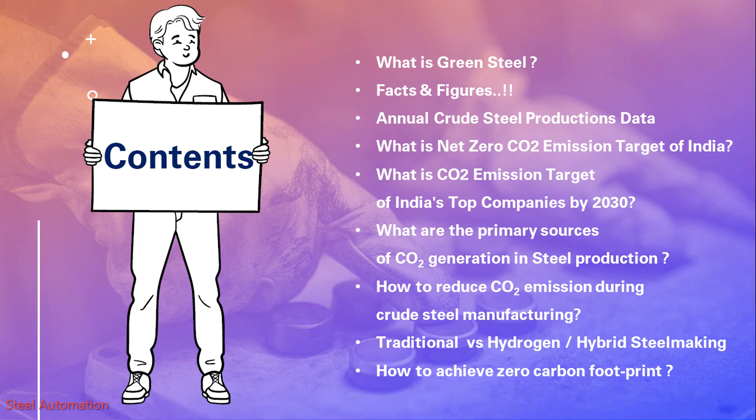So, what is green steel? Steel with zero carbon emissions, but in the current scenario, steel with the lowest carbon footprint currently possible. Forbes India mentioned in an article that, in order to significantly reduce CO2 emissions during steel production, fossil fuels, especially coal, need to be replaced by green hydrogen, which is produced from renewable energy sources.

Volkswagen plans to use this low-carbon, non-fossil fuel steel in major projects such as its upcoming Trinity electric sedan. Last year, Volvo and Mercedes-Benz announced that they too would soon use green steel in the production of their future models. This type of initiative will help significantly reduce the carbon footprint of these manufacturers, for whom sustainable development and the circular economy are now two key concepts.

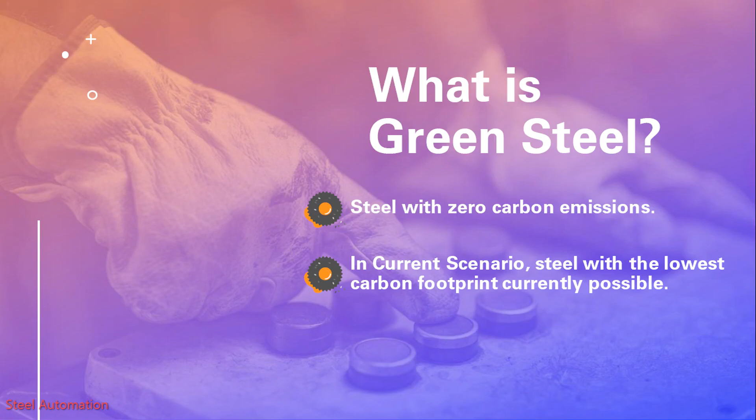Some facts and figures. This graph shows carbon emissions from fossil fuels and industry in billion tons, by continent and country. Asia is the largest contributor of carbon emissions in the current decade, whereas China is the largest contributor. Along with India, Qatar, Saudi Arabia and other fossil fuel producing countries are also part of the carbon emission.

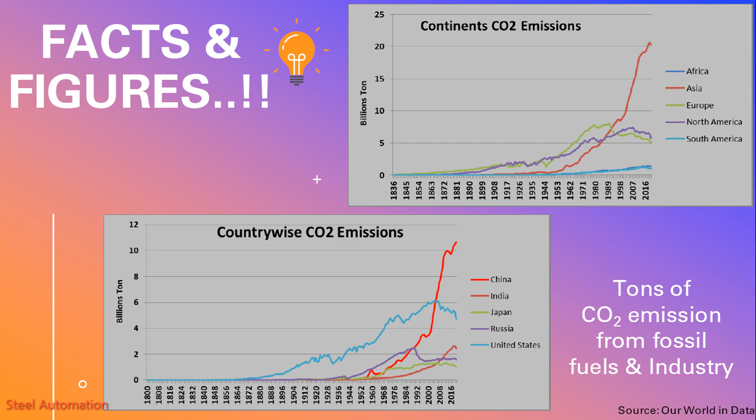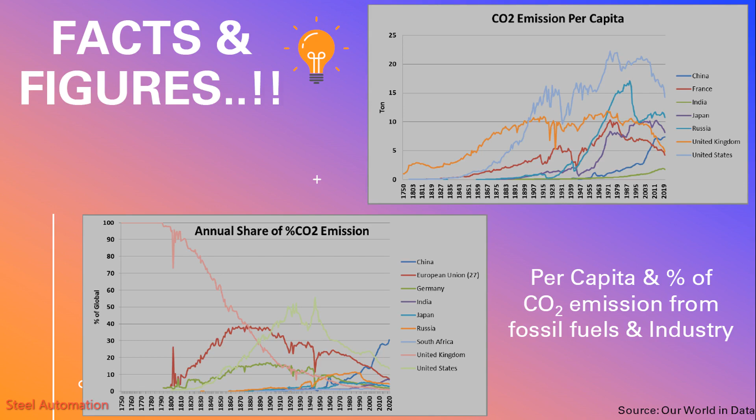In this graph we can see that carbon dioxide emissions per capita and percent share of annual global carbon dioxide emissions are increasing for Asian countries and developing countries. So, if we calculate the cumulative contribution of carbon dioxide emissions over the last 3 to 4 decades, the United States is the greatest contributor, followed by China.

Human emissions of carbon dioxide and other greenhouse gases are a primary driver of climate change. We see that over the last few decades, global temperatures have risen sharply to approximately 0.7 degrees centigrade higher than our 1961 to 1990 baseline. When extended back to 1850, we see that temperatures then were a further 0.4 degrees centigrade colder than in our baseline. Overall, this would amount to an average temperature rise of 1.1 degrees centigrade.

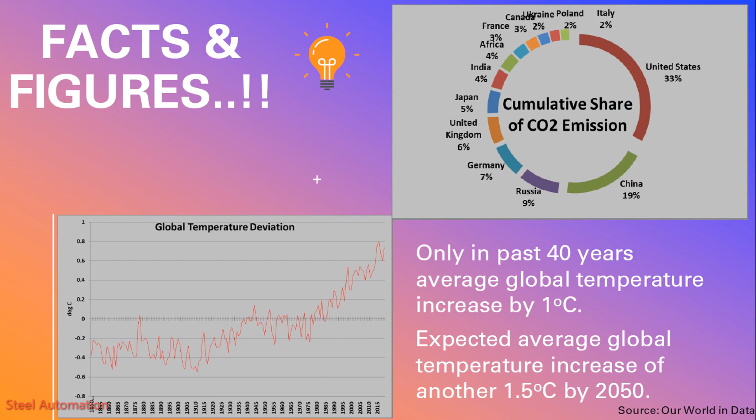Only in the past 40 years, average global temperature increased by 1 degree centigrade. An expected average global temperature increase of another 1.5 degrees Celsius by 2050 as per an expert. Emissions come from many sectors. It is clear from this breakdown that a range of sectors and processes contribute to global emissions. Let's walk through each of the sectors and subsectors in the pie chart one by one.

Energy sector, electricity, heat and transport, 73.2%. Out of which energy use in industry 24.2%, transport 16.2%. Energy use in buildings, 17.5%. Energy-related emissions from the manufacturing of iron and steel is 7.2%. Direct industrial processes, 5.2%. Waste, 3.2%. Agriculture, forestry and land use, 18.4%.

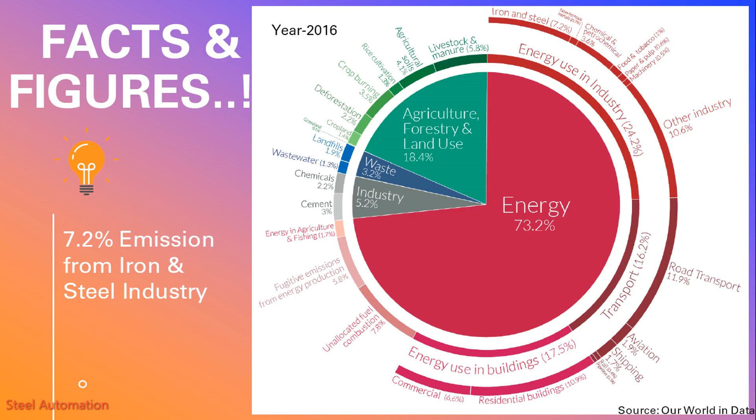So, if we look into the global annual production data of year 2021, China is the largest crude steel producer globally, 1,032 million tons, followed by India, 118 million tons, and then Japan, United States, Russia, and so on. If we look into the top 10 global companies, Tata Steel is at number 10, having production of 30.59 million tons of crude steel in the year 2021.

And if we look into India's top 5 steel manufacturing companies, Tata Steel is the largest manufacturer, followed by JSW Steel, Steel Authority of India, Jindal Steel and Power, and Vizag Steel. Tata Steel Group India produced 8.98% more than the previous year 2020, whereas other companies also gained production compared to 2020, like JSW Steel 25%, Steel Authority of India 15%, Jindal Steel and Power 6%, and Vizag Steel 40%. India is planning to double its steel capacity to 300 million tons by 2030-31 as per the Ministry of Steel, India.

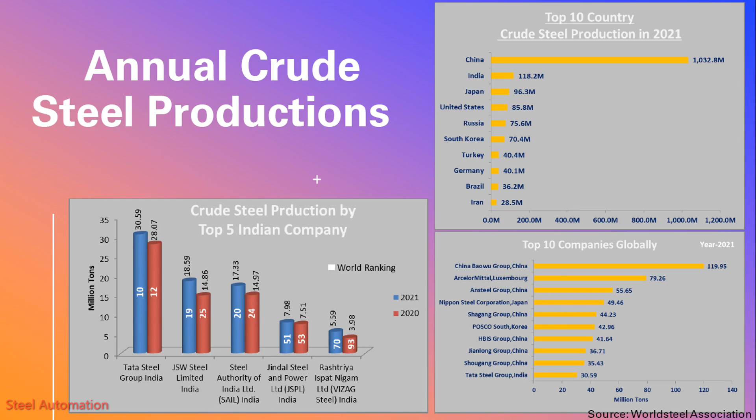What is the net zero CO2 emission target of India? India has promised to cut its emissions to net zero by 2070. Net zero, or becoming carbon neutral, means not adding to the amount of greenhouse gases in the atmosphere. China has announced plans for carbon neutrality by 2060, while the US and EU aim to hit net zero by 2050. India is the world's fourth biggest emitter of carbon dioxide, after China, the US, and the European Union.

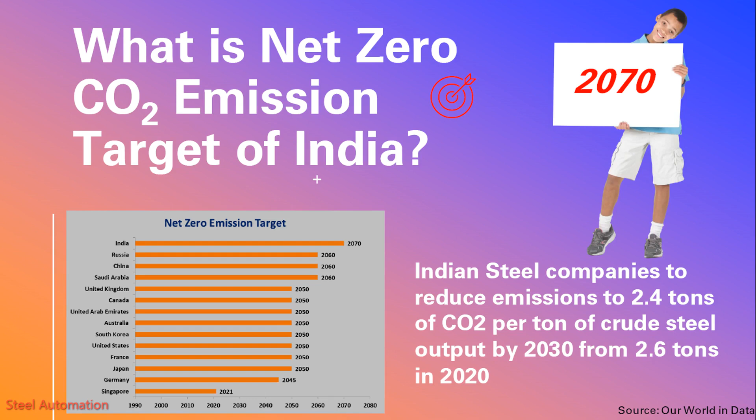Indian steel companies aim to reduce emissions to 2.4 tons of CO2 per ton of crude steel output by 2030 from 2.6 tons in 2020. What are the CO2 emission targets of India's top companies by 2030? Steel companies in India and their commitments to reduce CO2 emissions. 1. Tata Steel Limited, production capacity 34 MTPA, million tons per annum. Tata Steel has a mission to bring down carbon dioxide emissions to 1.8 tons of CO2 per ton of crude steel by 2030.

2. JSW Steel Limited, production capacity 18 MTPA. JSW Steel has set a target of achieving CO2 emissions of 1.95 ton CO2 per ton of steel by fiscal 2030. 3. Steel Authority of India Limited, SAIL, production capacity 21 MTPA. While projecting CO2 emission of 2.2-2.4 ton per TCS, tons per ton of crude steel, in the blast furnace BOF route and 2.6 to 2.7 ton per TCS in the DRI-EAF route by the terminal year 2030, SAIL has fixed a target of 2.30 ton of CO2 emission per ton of crude steel production by 2030.

4. Jindal Steel and Power Limited, JSPL, production capacity 8.4 MTPA. JSPL has ESG objectives to be amongst the top 10 lowest CO2 emitting steel companies in the world. The firm aims to significantly reduce its carbon footprint by almost half as part of its ESG objective.

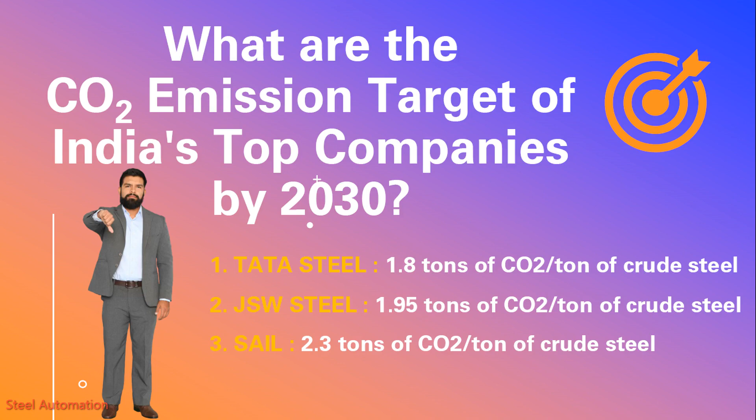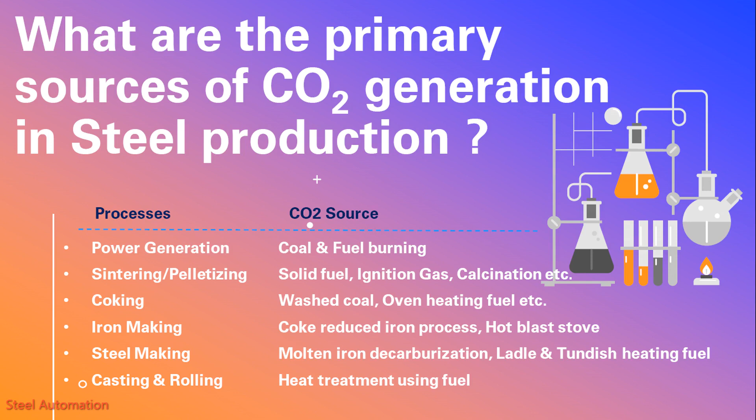How to reduce CO2 emission during crude steel manufacturing? 1. Use of green electrical energy. 2. Use of natural gas or biogas or green hydrogen as an alternative fuel. 3. Use of a carbon filtration plant. Tata Steel recently commissioned the first plant in India that captures carbon dioxide from blast furnace emissions at its Jamshedpur site. 4. Increase the share of scrap-based EAFs. 5. Reduction in use of hot metal from BF. 6. DRI and EAF using hydrogen.

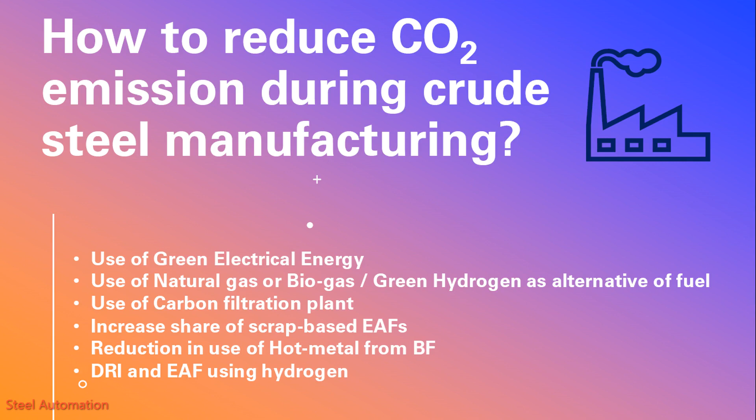Most blast furnaces are linked to a basic oxygen steel plant, for which the hot metal typically contains 4 to 4.5% carbon. So, to avoid the larger percentage of carbon in hot metal as steel melt shop input, we can replace it with purely iron scrap and DRI, to be melted through an electric arc furnace instead of a basic oxygen furnace.

Recently, news became very popular on social media that Tata Steel is staring at the prospect of shutting down its UK operations unless the British government steps in with a subsidy of about £1.5 billion, rupees 14,400 crore, in the course of the next 12 months. The aid will help the company cut down on its carbon emissions. A report by the Financial Times (FT) states that Tata Steel, as part of its decarbonization bid, will close 2 blast furnaces at Port Talbot and build 2 electric arc furnaces, which will be less carbon intensive. However, the report adds that this will cost the company about £3 billion and that the company is hoping to receive half of that amount from the UK government in the form of a subsidy.

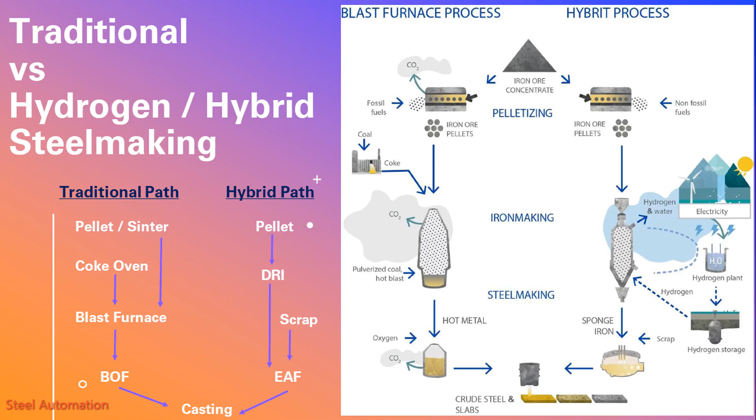Is it possible to achieve zero carbon footprint? Yes, it is possible to achieve zero carbon footprint in steel production. 1. By using green energy from renewable sources. 2. Use of hydrogen gas in DRI and electric arc furnace. 3. Purely scrap charging in electric arc furnace. 4. And use of carbon capture from furnace gases. Thanks for watching. Hope you have understood the way forward, how to reduce carbon emissions generated from the iron and steel industry.